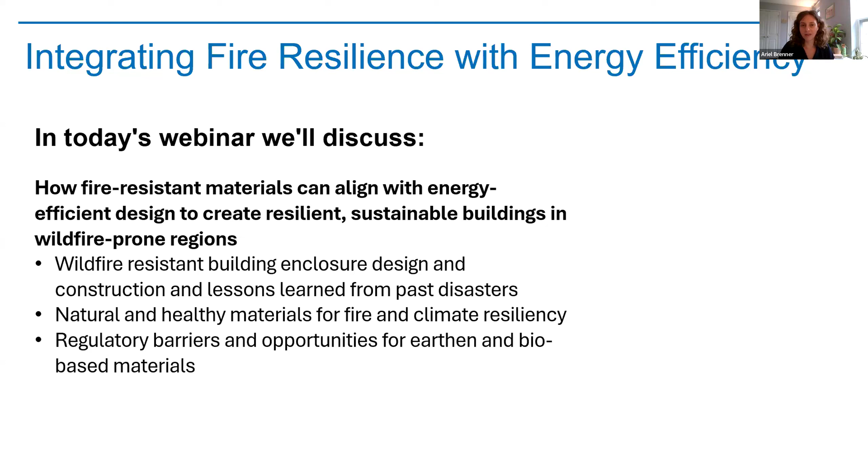So as I mentioned, we have a really fantastic lineup of presenters today. A quick introduction to them. Cameron Chorney is an associate and senior engineer with RDH Building Science, leading the development of RDH's Southern California practice. He's experienced in both new building projects as well as building enclosure assessments and renewals of existing buildings across the country. He specializes in high performance building design, including net zero construction, wildfire resistant enclosures, climate resilient enclosure design, and the development of policies and guidelines to advance building science.

Ali Keenan is an architect and designer who founded her own boutique practice, Ali Keenan Architecture. Her work responds to site and climate, celebrates the craft and honesty of materials, and has a sense of place and locality. She is a healthy material and sustainability advocate while actively researching alternative building methods and fire-resistant practices with the goal of making architecture more accessible and affordable for all.

And finally, Ben Loescher is the founding principal at Loescher Meacham Architects, where his work focuses on the reuse of existing buildings, high-performance workplace design for the film, television, and media industries, and innovation in earthen construction. In 2009, he created Adobe Is Not Software, the firm's advocacy arm that informs, enables, and advances adobe construction in California. Ben was the chair of the Earth Builders Guild, the U.S. trade association for earthen construction, from 2016 to 2023, and is a board member of Adobe in Action, a New Mexico-based nonprofit focused on assisting individuals in creating affordable earthen housing.

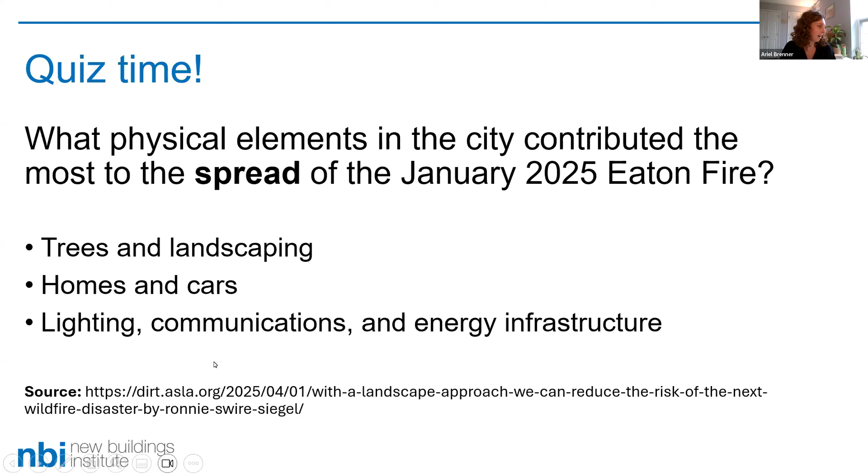Great, thanks, Ariel. And I assume everyone can see my screen there. Seeing some nods, great. Yeah, so like Ariel mentioned, Cameron Chorney with RDH Building Science. We're consulting engineers focused on building enclosures. And as you'll see today, it has a large contributing factor to wildfire performance of homes and other buildings. Quick disclaimer, trying to push out some information in industry and providing concepts here. So project by project definitely can change.

And what I'll talk about today is mostly what is wildfire resistant construction, why do we need it, get into some nitty-gritty assemblies and details that we can hopefully use on similar projects, and then look to the future and the current state of how do we minimize future events moving forward. So why wildfire resistant construction?

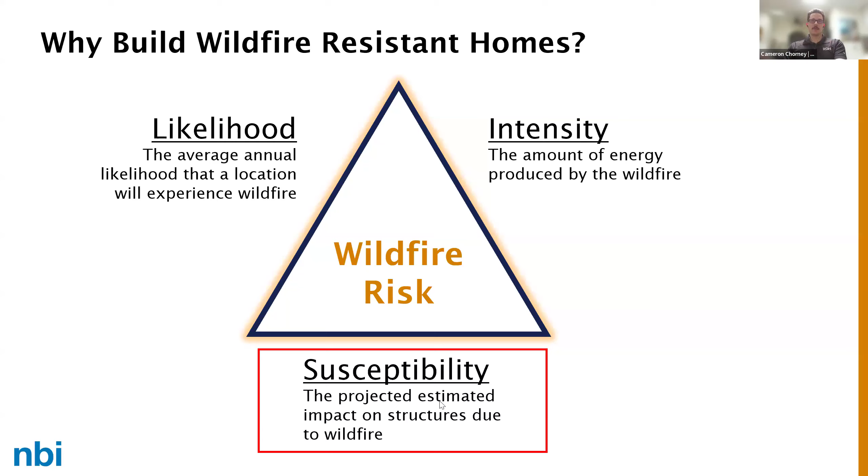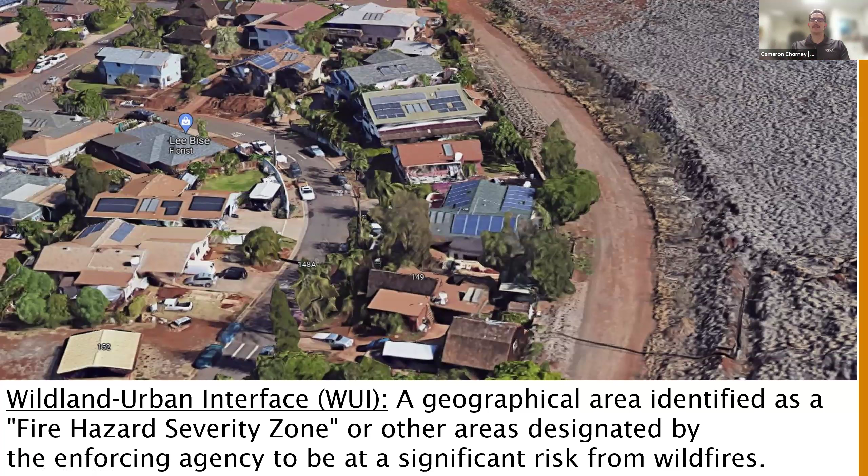And I'll mention WUI, or wildland urban interface, throughout this presentation. So just a quick definition for you. Geographical area identified as a fire hazard severity zone or other areas as designated by the enforcing agency to be at significant risk from wildfire. And this is a picture from Lahaina, which we know what happened there, unfortunately. And you can see the brushland on the right, and then right next to a community there. So that's the definition in picture format.

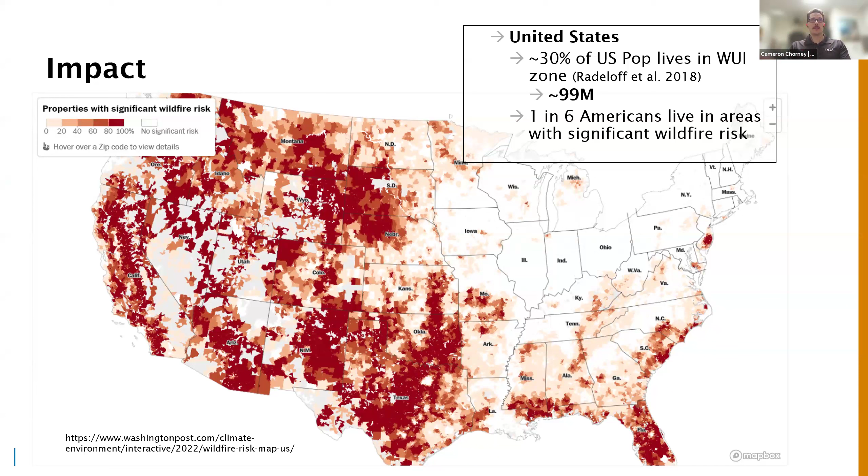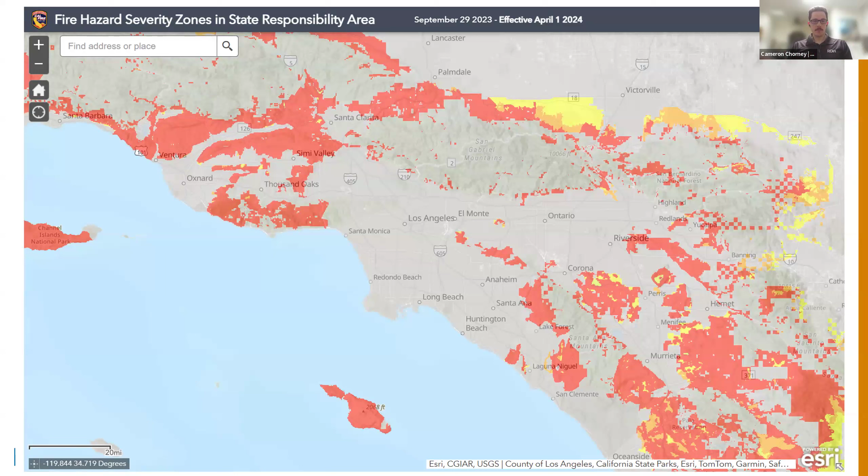And in terms of who is in that zone, the WUI zone, in reality, it's about 30% of the U.S. population, and so that's 1 in 6 Americans live in a significant wildfire risk beyond being in that. So it's closer than a lot of us think, unfortunately. And how might you know that you're in this WUI zone or wildfire risk? So a lot of it is defined in building codes, and from the building codes, they look to the local fire marshal. Here in California, the wildfire maps identify on a map where there are various levels of fire risk and severity, and that helps inform your decision making or need to be wildfire resistant.

So Ariel mentioned kind of trees versus cars versus homes at the start, and these WUI fires and disasters progress in various ways, but more often than not, it starts with a fire starting. Maybe it's a spark from an electrical wire, maybe it's some other ignition source, and with some high winds or dry conditions, that spreads in the wildland. And then when getting to the interface zone with houses, a lot of times it's ember transport that causes a lot of these homes to start igniting. And from there, we go from a wildfire, WUI zone fire to a structure or residential fire, which has a lot higher fuel density and load.

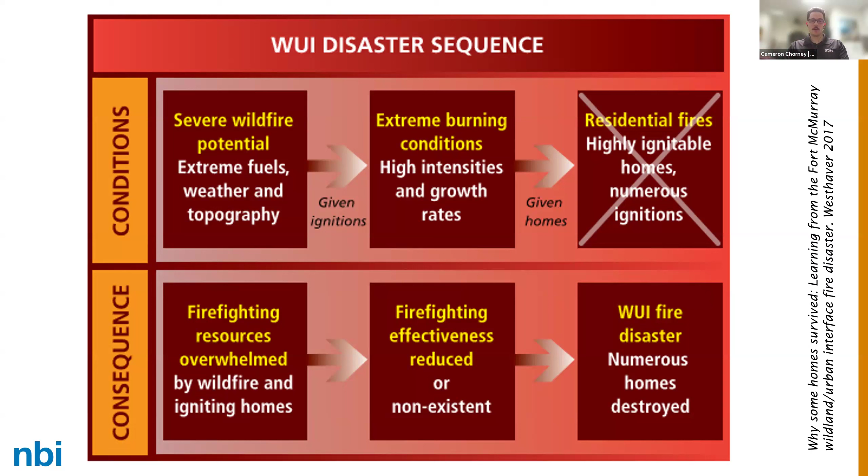And accordingly, you can see the consequence on the lower side. So a brush fire, a single brush fire, is pretty easy sometimes for firefighters to get to. But then we start progressing to more fires and then more structure fires. Firefighting resources can become overwhelmed pretty quick, and that's when it gets to a larger scale event like we saw, unfortunately.

So I mentioned how fires start. So Ariel mentioned the cars and homes versus trees and bushes. So the initial transport or start of a lot of the structure fires starts when the fire is away from homes, and it's actually the embers from various trees that are burning in high winds that get blown towards structures and get into ventilated soffits and to combustible materials in our structures that then catch on fire and then can progress to the structure fire type thing.

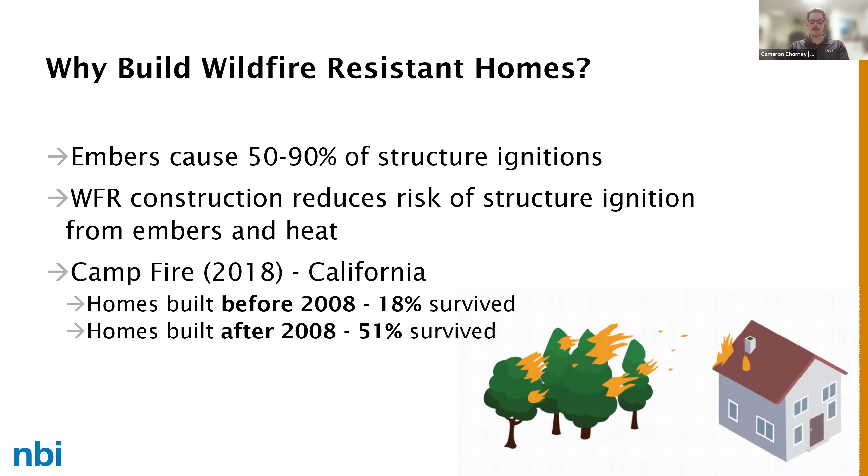A lesson learned from the Camp Fire in 2018. So we can see these numbers. Homes built before 2008, 18% survived, and homes built after 2008, maybe 51 or more percent survived. So what happened there here in California? That was when Chapter 7A in the California Building Code came into effect, implementing wildfire resistant construction. So proof in the numbers that it can work, and we do know how to help make it work. But still, even at code minimum, there is still some risk there, as we see with just 51% surviving.

So from there, how do we build those homes or those structures? Really, a wildfire resistant structure is intended to reduce structure ignition due to wildfire, and based on that, slow the spread throughout the community. So we'll talk a lot about the structure today, but as Ara mentioned, the big aspect is the landscaping and limiting the fuel in close proximity to your structure. So think the first 5 or 10 feet around your home with limited or no combustible material for those embers to catch on fire, and then more fuel load. And then outside of that, looking more to community level, limiting maybe the trees, or having certain wildfire resistant type trees and foliage to help limit that risk.

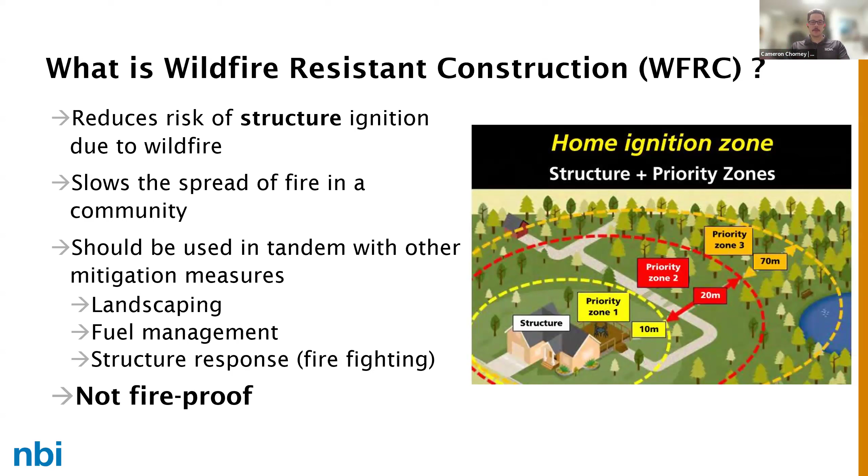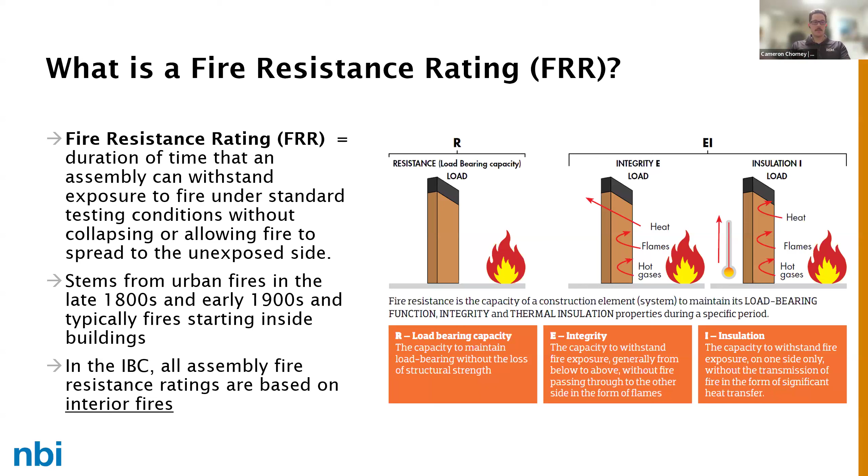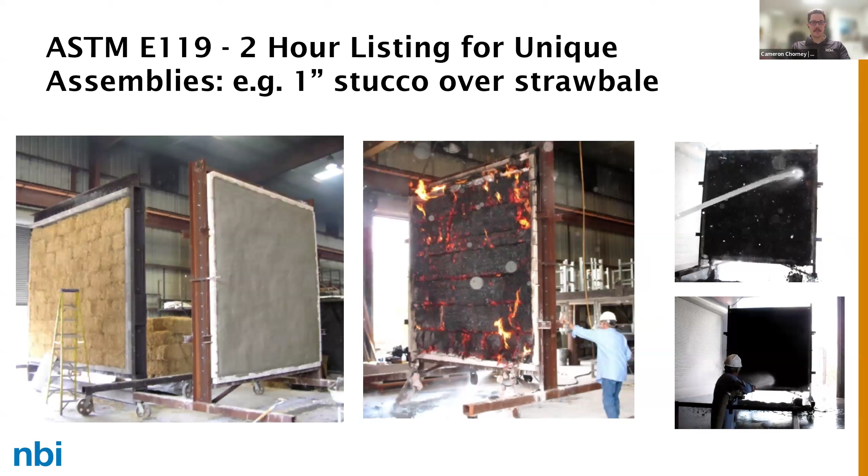And then finally, wildfire resistant construction is not fireproof per se, but it's meant to resist the loads that we're seeing with wildfire. And for maybe some architects in the room, you might hear fire resistance rating. A lot of the times we're thinking about interior and exterior when you might hear that in the code. So similar concept for exterior to interior with wildfire. So we'll say fire resistant rating quite a bit. And a nice example, a lot of different assemblies can be fire resistant. Even a straw bale with stucco assembly here, there's some testing to show that it is wildfire resistant.

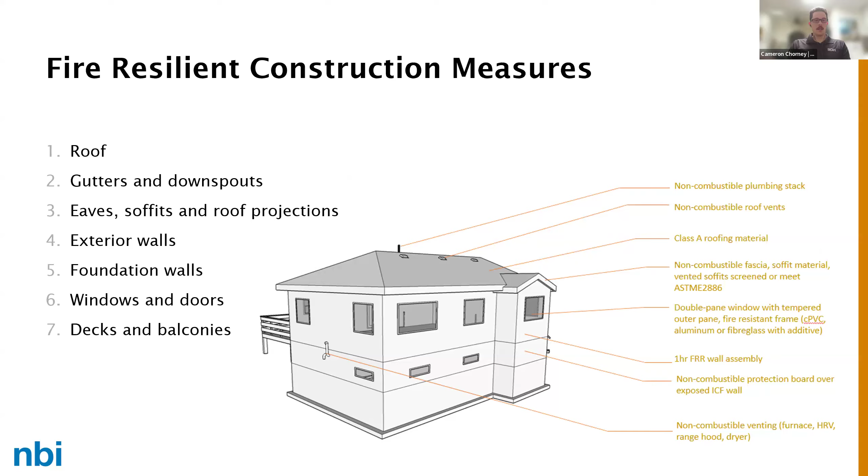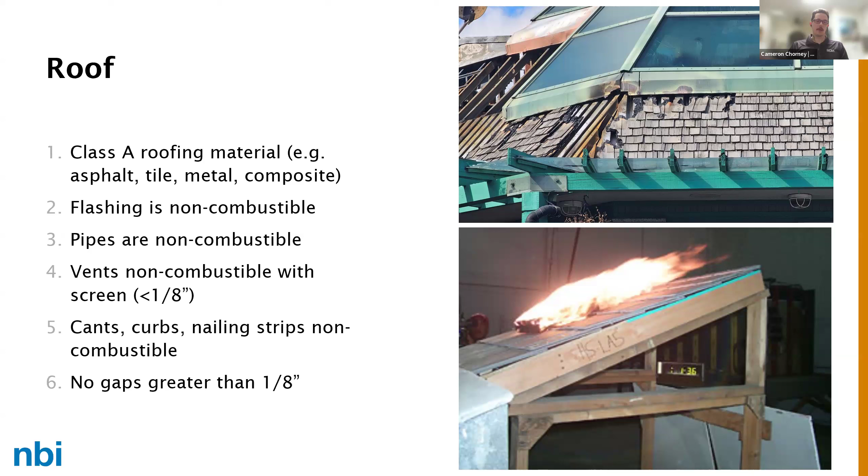And then looking at the various things that put together our structure that we need to think about. So you can see all the various aspects that we'll look at. So starting with the roof, we'll say non-combustible or fire resistant exterior surface a lot, and that's Class A roofing in this example. All flashing, pipes, vents. Like I mentioned, the embers are a big one with ventilated roof assemblies. So having vents that won't melt, so they're non-combustible, and that don't allow embers to go through them into that attic space, which has a lot of combustible materials up there, is super important. And then gutters, having a screen that stops debris from your trees from getting in there, more fuel essentially.

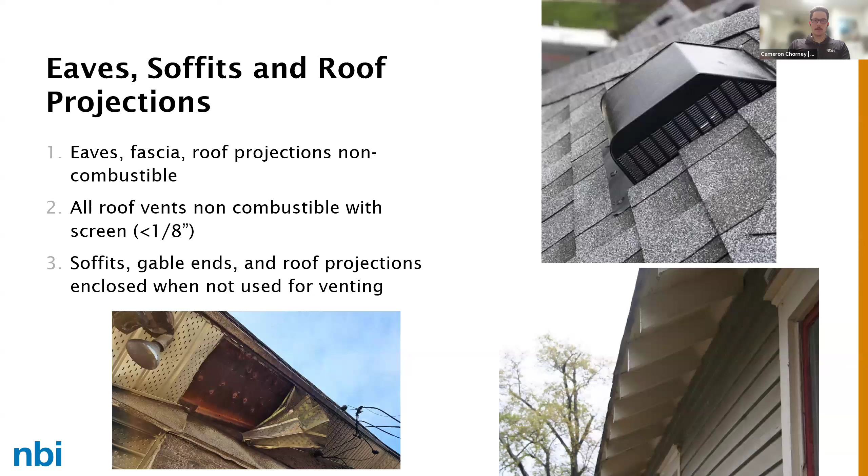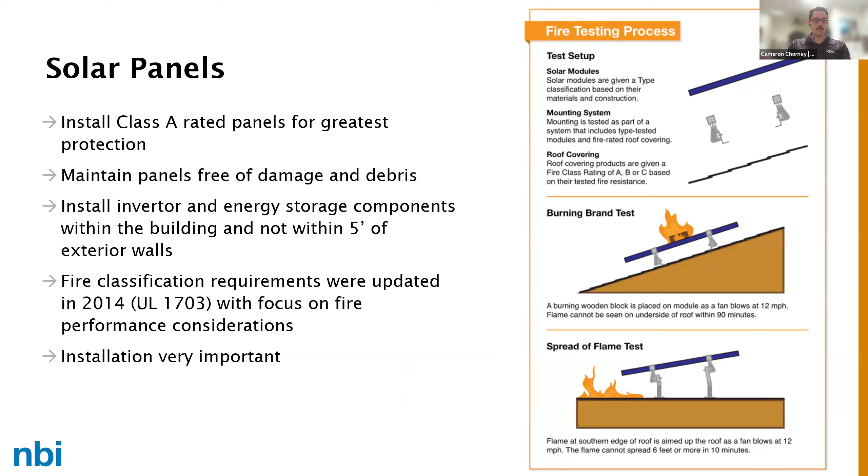Using soffits, so you can see bottom right with exposed wood, which is a high risk and very, very likely to catch on fire in a wildfire event. And then on the left, we saw some soffit venting, but they're not non-combustible. They fell out, and that can cause fire. So being non-combustible is important. And then looking at mitigation, solar panels are a big aspect of mitigation efforts in our building codes. They also have fire risk, so make sure they're Class A, similar to your roofs, and installation is important, and maintain those as well, make sure there's not much debris on them.

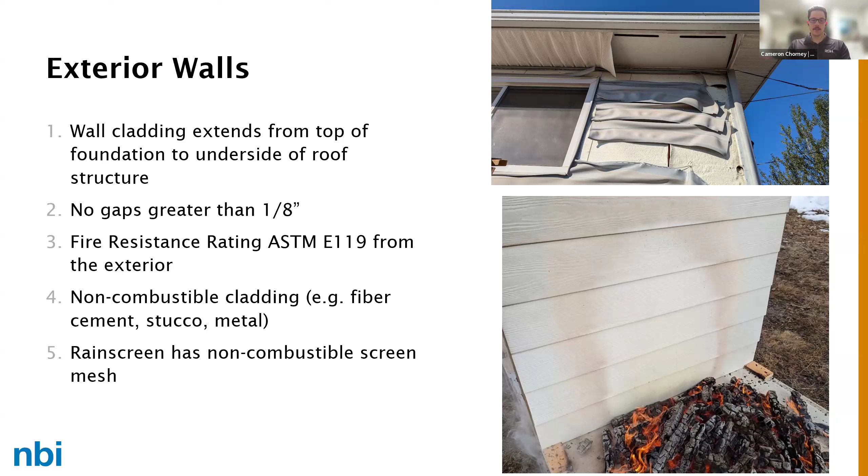Exterior walls, similar, fire resistant or non-combustible. Cladding is important. Think fiber cement, stucco, metal, not having any gaps, or we use rain screens a lot these days, not allowing embers to get up into that rain screen. So similar, using the mesh. And you can see some examples of vinyl in the top right, melting away, and fiber cement in our similar internal testing, that is pretty resistant. And then for some options to make those truly wildfire resistant wall assemblies, similar to other architectural assemblies, using gypsum is a good approach to prevent fire from getting to the structure, which is then the biggest loss event. And another one that ties in energy efficiency and high performance buildings, using exterior insulation that's non-combustible or fire resistant.

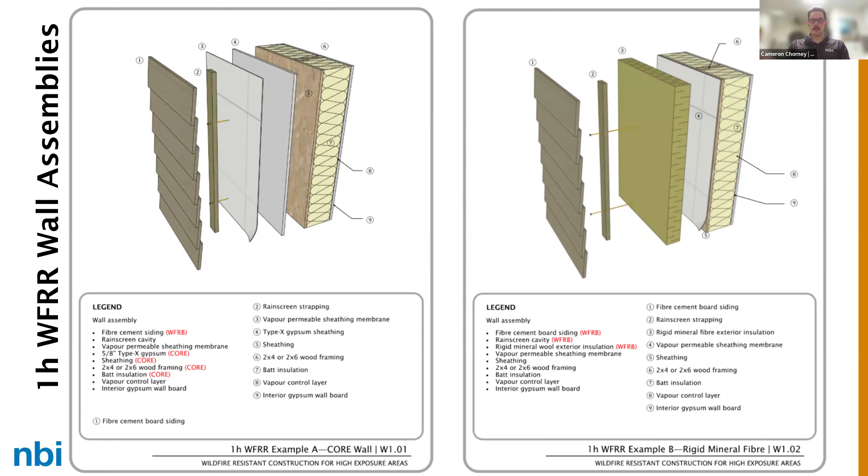And then windows, I didn't mention it yet, but they're also one of the biggest opportunities for fire to enter the structure and cause big damage. So how that happens with vinyl windows, which are on a lot of homes, the vinyl frame will actually melt, and the glass will just fall out of that window. Another is, you have a lot of heat, and glass can only withstand a certain amount of heat.

Annealed glass, float glass we call it. Tempered glass, which is more of a safety glass, is more heat resistant. And one way we can do that is with double pane, with a single pane of tempered glass. And through some testing, the location of that pane is important, usually on the exterior side.

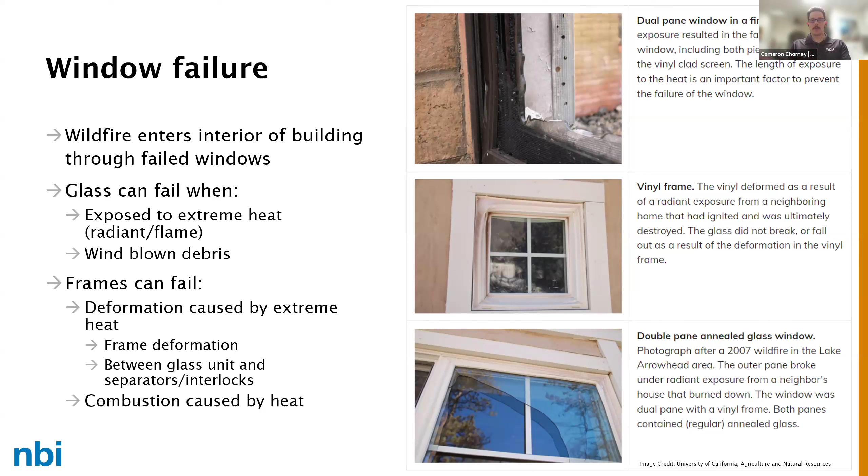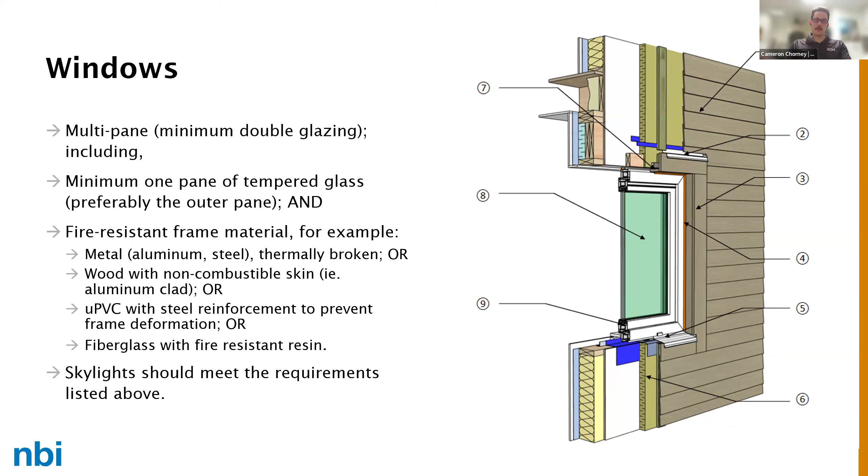So windows, using a fire resistant frame material, think aluminum, steel, some other ones. And then if you are using vinyl, which is allowed by the code currently, allowing reinforcement or designing those windows so that the glass doesn't actually fall out. And similar idea for skylights.

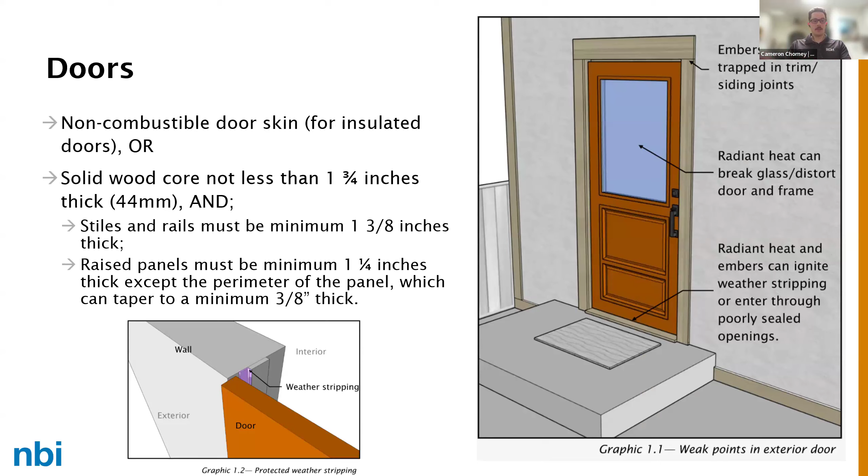Looking at doors, so similar non-combustible doors, and then looking at the details around those doors, not allowing embers to get in. So using weather stripping and other non-combustible stiles and trims and flashings. And then looking beyond assemblies to the actual details. So great, we have all these nice fire resistant assemblies, but it's always the details in between them that can be challenging and vulnerable.

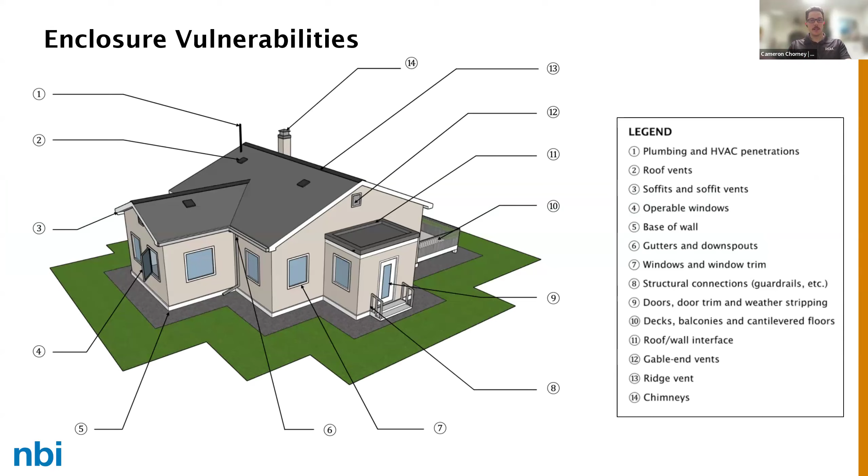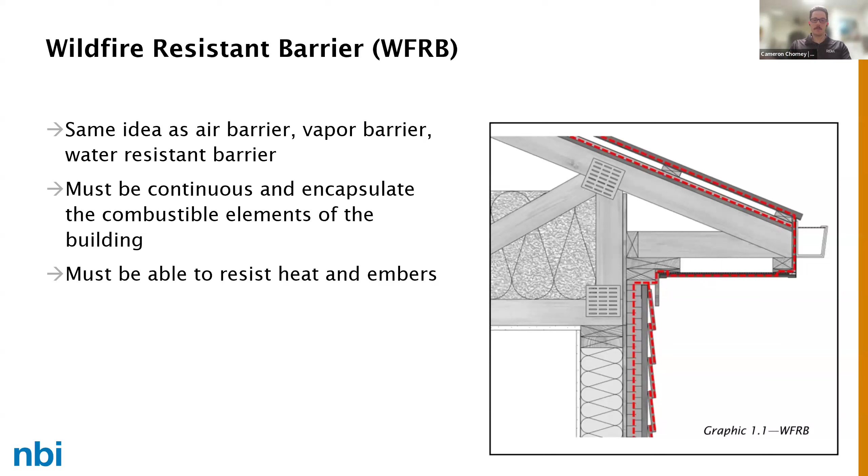So starting with wildfires and assemblies, and then looking at all those little interfaces. As a building enclosure consultant, we always look at the control layers, thinking of an air barrier or a water resistive barrier, trying to be a consistent line, continuous around your building. So we really look at the next control layer as being a wildfire resistive barrier. Can you draw a line without picking the pen up off the paper around your building and all your details through the wildfire resistant construction or barrier? And what is that assembly, what is that material, and how are all those things coming together? It's super important to reducing the vulnerability.

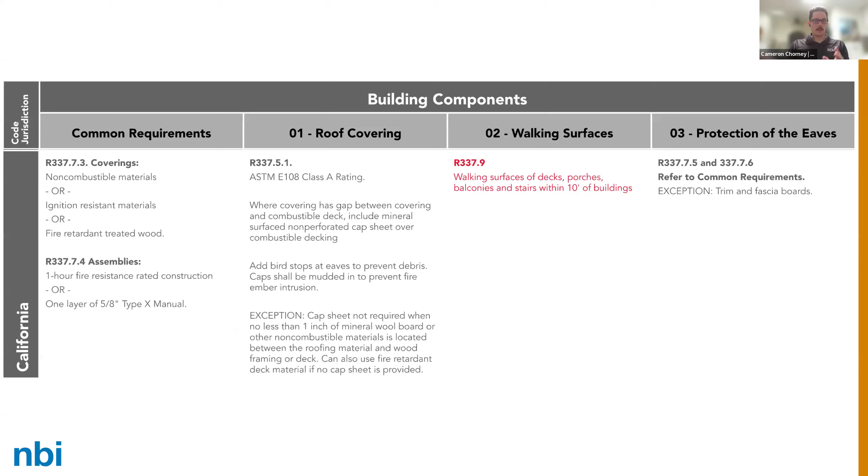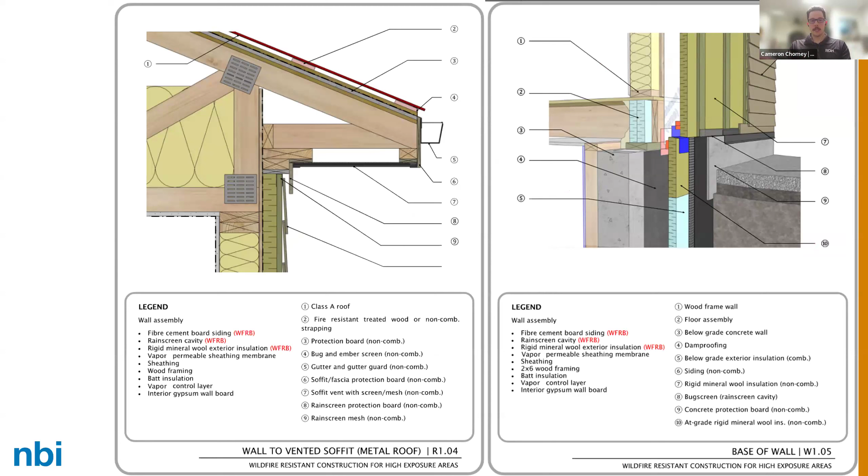And then to bring this together, some details. So we worked on a guide with Rockwool, and we've done some other internal guides to help pass this information along. These are all the assemblies based on different codes: walls, foundations, gutters. You can see here glazing. It's really wrapping up all these lessons learned into guidance to help push the industry forward. And then we have some details in there that point out specific materials to not only provide wildfire resistance but energy efficiency and good building enclosure practices. Similar for windows.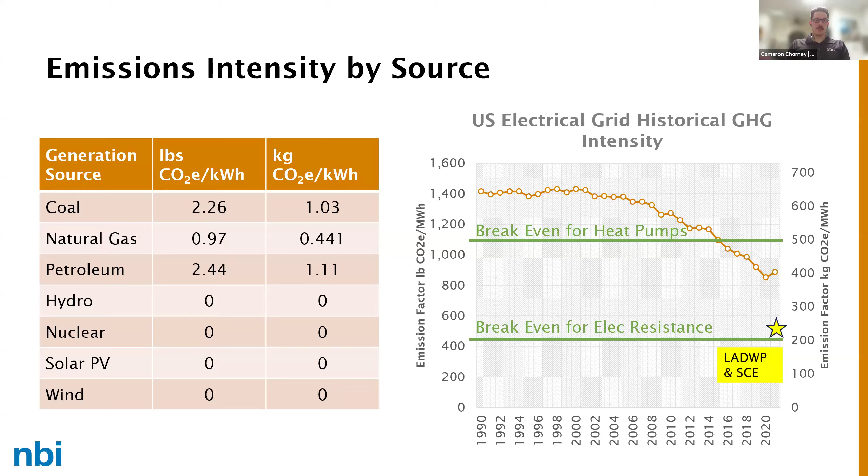You can see just locally here where I'm at in Los Angeles, LADWP and Southern California Edison have switched from natural gas and coal to more electric and renewable energies. So you can see the grid greenhouse gas emissions are much lower than the rest of the US. And that provides an opportunity, as you build a home, if your grid is very green, to use less combustibles by switching to electric appliances or heating and cooling systems, or even vehicles. There are huge opportunities to reduce greenhouse gas emissions and hopefully slow climate change by using electric as opposed to gas.

So this is an example from a hospital we worked on. Reducing energy use as much as we can with high performance enclosures, but then fuel switching. You can see on the right, from that baseline with code minimum and combustible natural gas for fuel, switching to high performance and electrification reduces up to 80% of operational greenhouse gas emissions, which is massive over the long term.

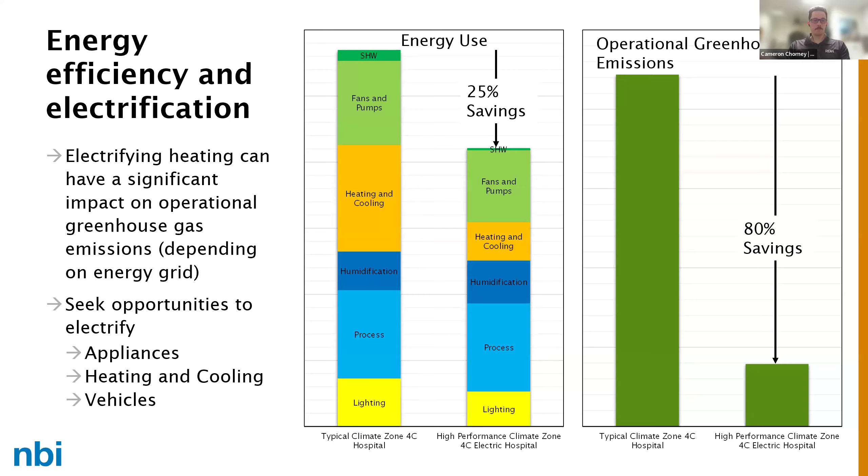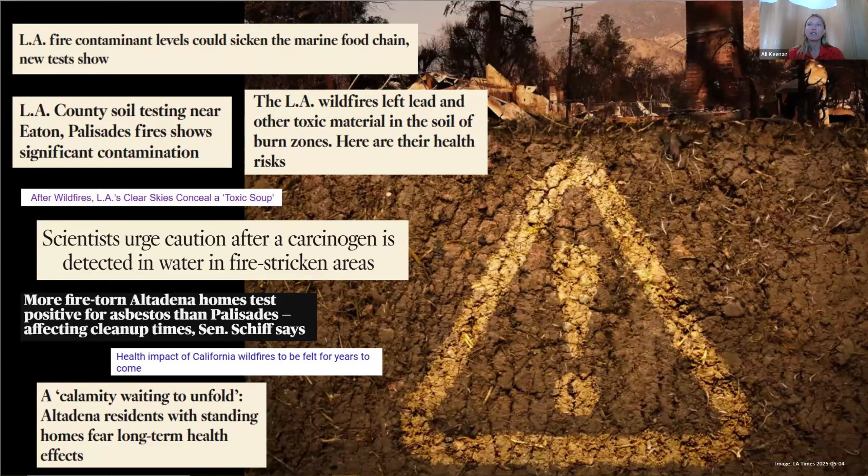As an aftermath of the January 2025 Los Angeles fires, we've seen dangerous air quality, benzene contaminating the water supply, lead and arsenic in the soil, heavy metals in the ocean. 5 months later, and we're still finding new levels of pollutants. These chemicals put us at risk of cancer, hormone disruption, nervous system disorders, reproductive challenges, infertility issues, and other life-threatening diseases. There are also many unknown lasting consequences and questions. Will kids ever be able to safely play in their own backyards again? These toxic chemicals are coming from our buildings.

When I look at this photo, I see the emotional trauma of loss, but I also see the amount of waste. Buildings and the materials that make them deserve a longer life expectancy. The construction industry is one of the most significant contributors to climate change. It's the world's largest consumer of resources and raw materials. It's also responsible for 30 to 40% of global CO2 emissions.

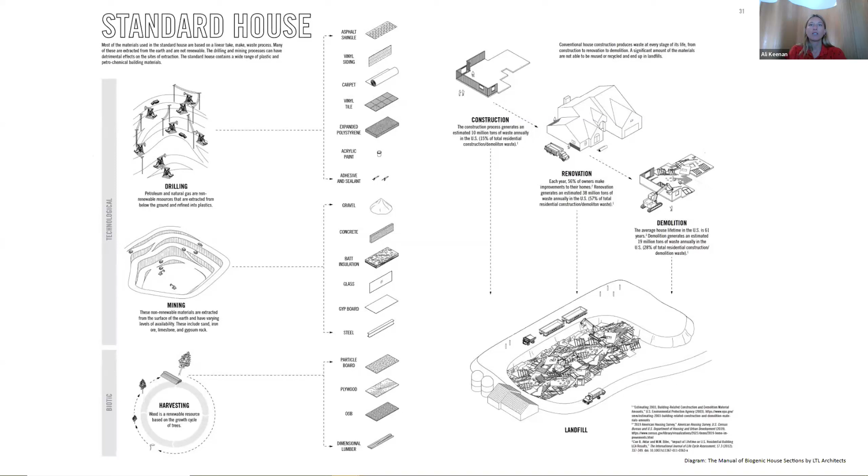As this diagram illustrates, most of the materials used in a standard house are based on a linear take, make, waste process. We mine, we drill, we harvest, over and over and over again. Only a small portion of materials are from renewable resources. Then we use tens of thousands of tons of hazardous chemicals to turn these resources into building products each year. Chemicals that are linked to negative impacts on human health, a decline in biodiversity, an increase in greenhouse gases, and many other environmental disasters. An alarming amount of these materials then end up in landfills each year, not able to be reused or recycled.

To me, when we talk about fire resiliency, we can't leave climate resiliency out of the conversation. Climate change is happening, and there's no stopping or solving the crisis at this point. We do have the tools to minimize the damage, mitigate the effects, and stop it from getting worse. But it will take collective action and an industry shift. We also have a nationwide health crisis. Whether people know it or not, they are getting sick from their buildings.

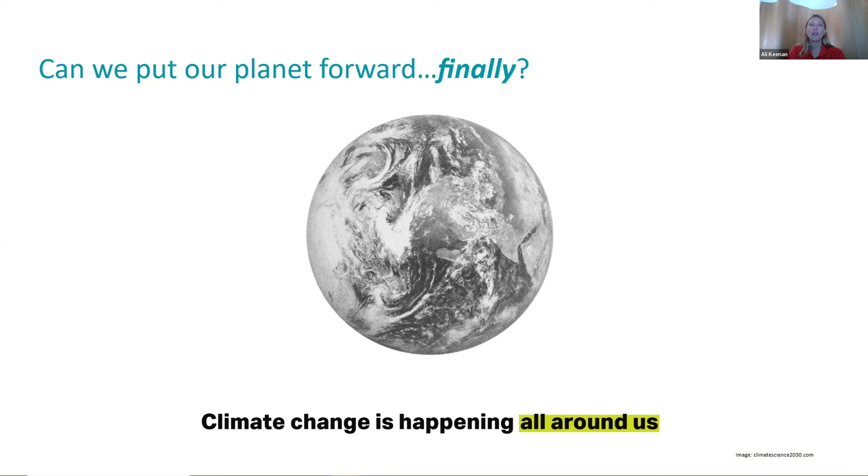That being said, fire resilience requires a holistic approach. There isn't one solution to make a building fire resilient, nor will anything ever be 100% fireproof. How can we make less of an impact to our communities, to our planet, to our health? How can we reduce the amount of environmental pollutants, plastics, foams, forever chemicals? How can we lessen the impact to our planet's resources, raw materials, and labor force? We need to steer the rebuilding conversation this way, to more sustainable, more natural, and healthier building techniques and materials. This typology is truly high-performance design.

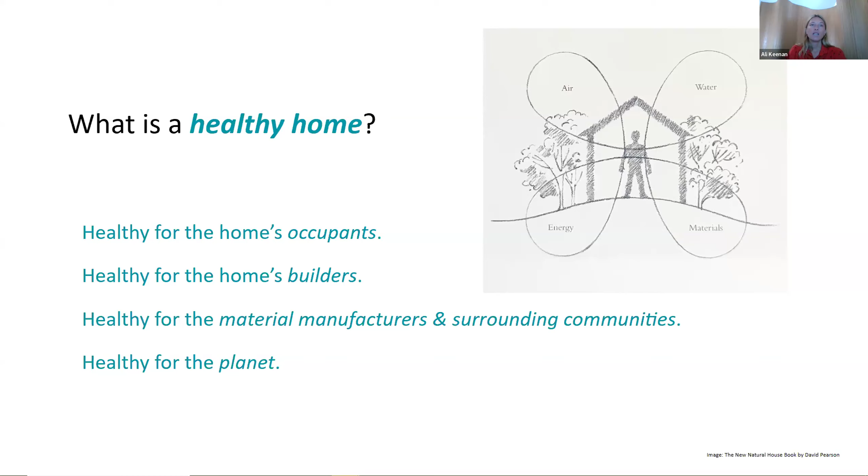What is a healthy home? Healthy for the home's occupants, healthy for the home's builders, healthy for the material manufacturers and surrounding communities, healthy for the planet. At this point in time, this concept still takes an immense amount of convincing to both homeowners and contractors. I hope to give you some tools to evaluate your decisions as design and building professionals. Once we get more momentum, we can build more purchasing power to help stabilize the pricing and supply chain of these products and to grow the knowledge base for labor and installation. We, as building and design professionals, have a lot of power.

Americans spend approximately 90% of their time indoors. The air inside our homes is 2 to 5 times more polluted than the air outside. Chemicals and materials are not static. Volatilization, leaching, oxidation, and degradation are some of the processes that release substances from materials into the surrounding environment. On a typical day, you are then exposed to these chemicals through inhalation, ingestion, and dermal absorption. Now fire is thrown into the mix, creating toxic ash, dust, and new chemical byproducts called dioxins that contaminate surfaces, air, water, and soil.

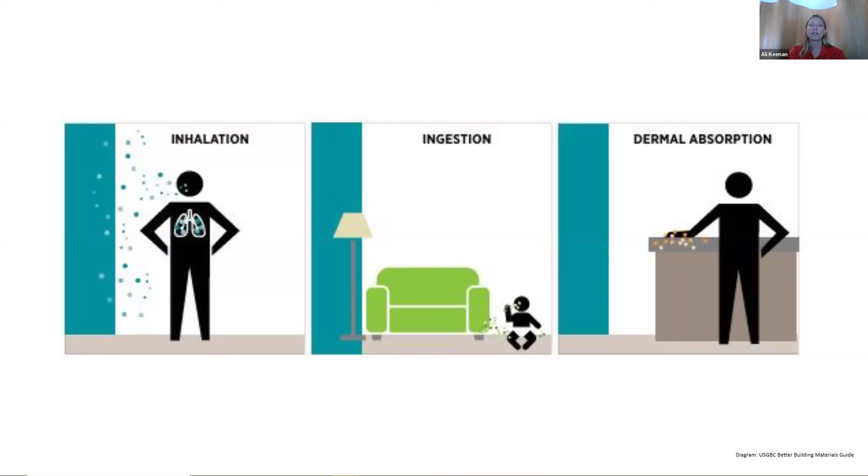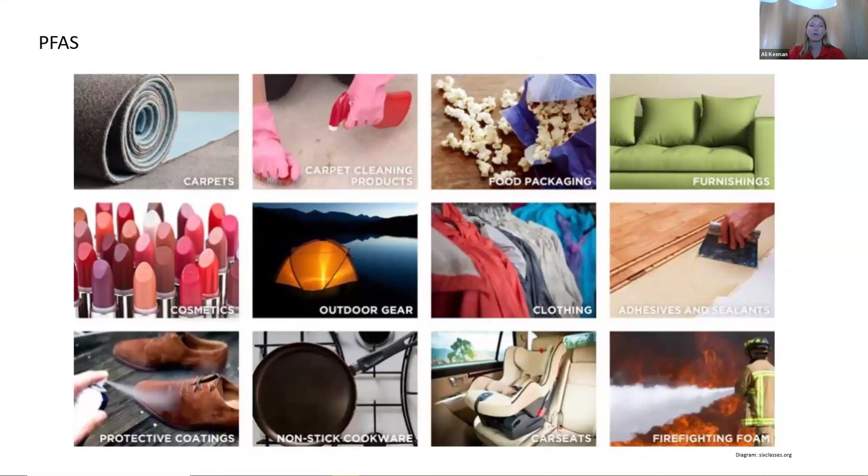The use of flame retardants in furniture, mattresses, children's products, electronics, and building materials provides limited fire safety benefit. Research shows that they often delay ignition only a few seconds and can make a fire more toxic. Even flame retardants developed as eco-friendly alternatives could be more harmful than expected.

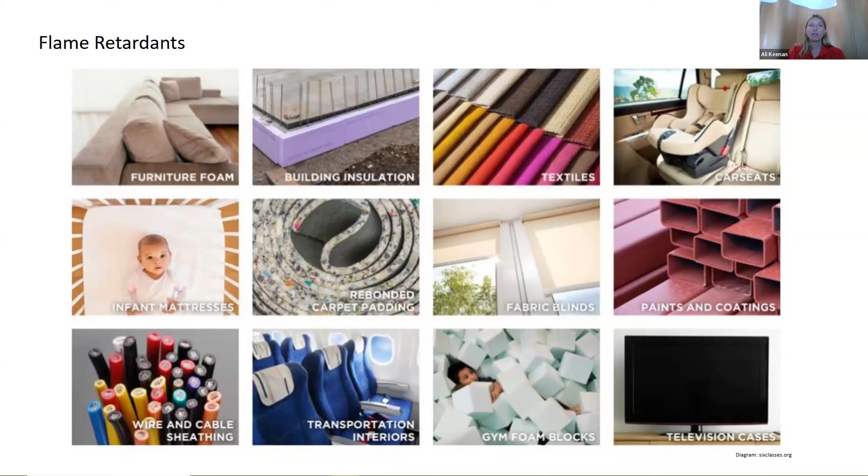There's a common pattern in industrial chemistry to replace banned chemicals with similar yet not well understood compounds. Often the substitute compound turns out to be equally problematic. Smoke detectors and sprinkler systems are more effective to prevent a house fire with an interior ignition source. Sheep's wool is a natural alternative to chemical flame retardants found in upholstery and mattresses. There are bio-based materials that are inherently fire resistant for exterior rated assemblies and building insulation.

In the haste of rebuilding, I've heard a lot of people throwing around foam panels, concrete bunkers, Trex siding as a solution to fire resistance. Fire resiliency doesn't need to be concrete or foam or plastic. We can turn to plant-based and earth-based low-carbon materials. We can incorporate these into fire-resilient assemblies.

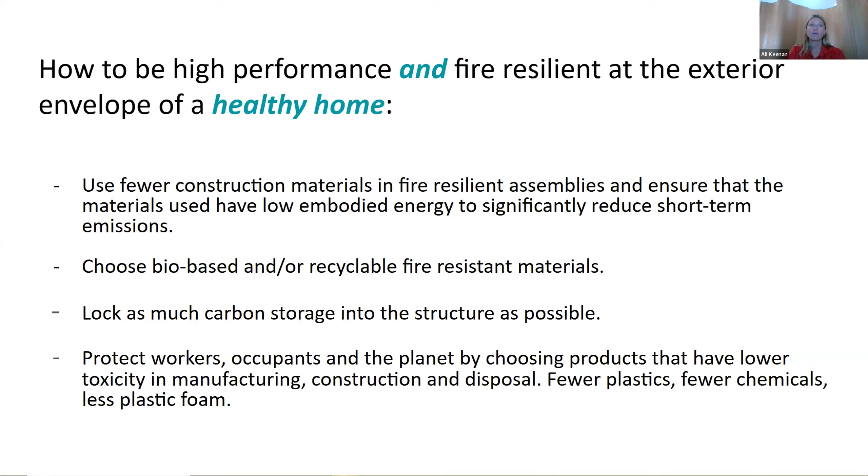Earthen building is the world's oldest high-performance and sustainable construction technology. Materials that originate from ecological sources combined with current technology can produce durable, high-performing, and regenerative building products. Many earthen and bio-based building techniques are inherently fire-resistant. They have low embodied energy, small carbon footprints. They naturally sequester and store carbon from the atmosphere. They can replace plastics and other fossil fuel-based products. Ideally, they biodegrade at the end of their useful life and benefit the ecosystems.

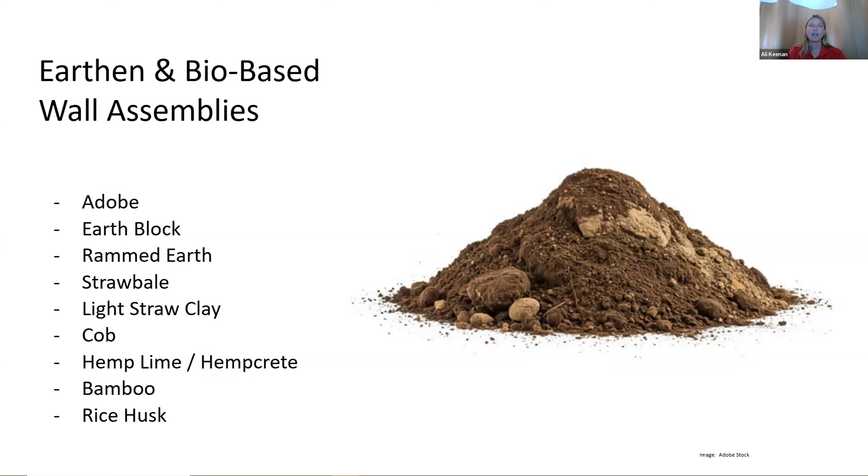Earthen and bio-based materials lead to an entirely new wall assembly, which includes the elimination of several material layers found in a typical wall section. Looking at hemp lime specifically, you can see in the right-hand column that there are only three materials needed for the wall. Because of its inherent qualities, it acts as paint, drywall, insulation, vapor barrier, and metal lath. Compare that to a traditional wood clapboard assembly that uses double the materials. This simplification reduces the complexity of a wall, reduces cost, and significantly reduces the amount of embodied carbon.

Hemp lime is naturally flame retardant, which eliminates the need for added flame retardant chemicals. The material's vapor permeability and humidity regulation can drastically reduce mold and bacteria growth, eliminating the need for added antimicrobials. It's also naturally resistant to pests, eliminating the need for pesticides. Hemp and lime products are naturally biodegradable and can be fully recycled to support a zero-waste economy.

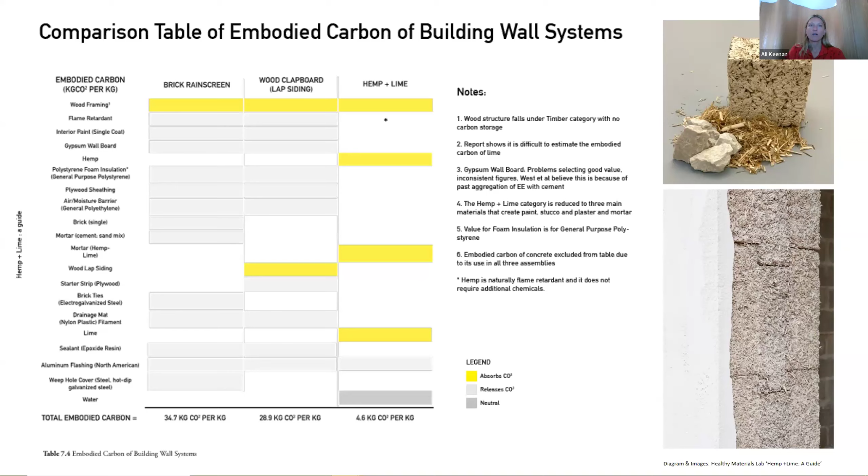Let's take a look at a more conventional construction assembly. When considering high-performance design and fire-resilient design, even separately, unvented roof assemblies are the answer. Continuous thermal bridge-free insulation is the best insulation. It provides predictability and protection. It pushes the condensation plane to the exterior of the roof, mitigating moisture and mold issues. It eliminates eave and roof vents, which are common entry points for embers during fires. Continuous insulation also acts as a fire-resistant layer of the assembly.

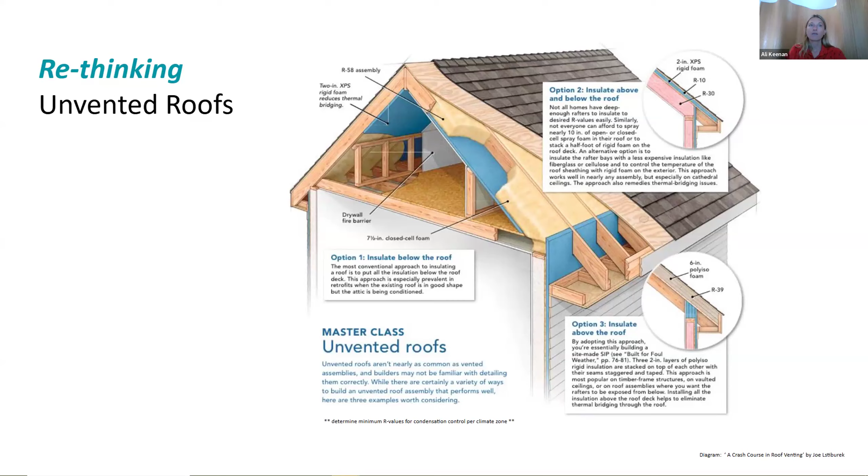When evaluating these conventional assemblies, the website Informed is my first stop. For each building component, it lists the different material choices and rates them based on health impact. Here you can see that rigid foam boards and spray foam are all in the red. Looking to the green zone, we find alternative insulation boards that work with this assembly: expanded cork, wood fiber, and mineral stone wool.

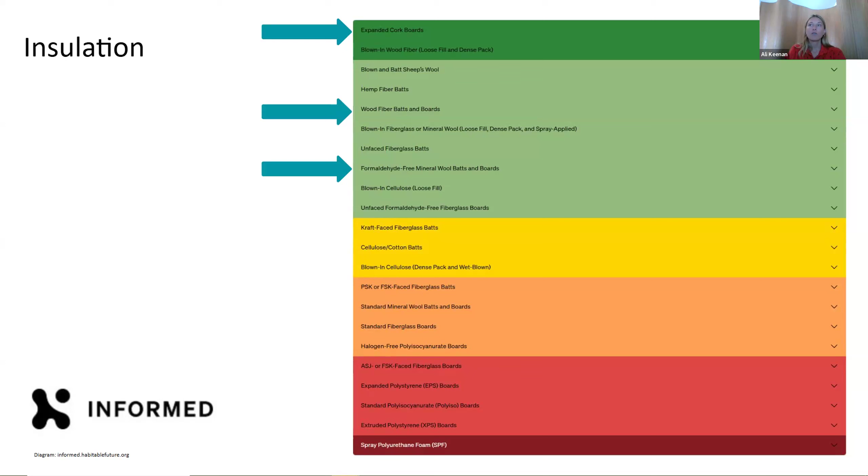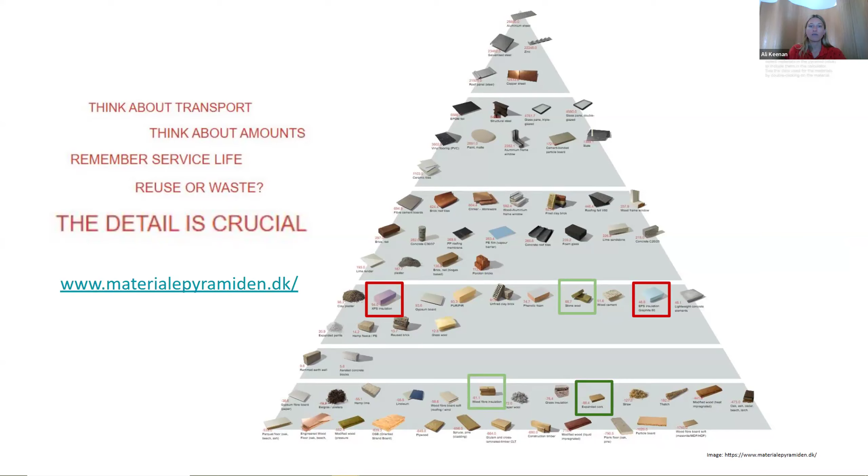Using these tools, we found 3 healthy home alternatives for an unvented roof assembly. Cork and wood fiber are renewable resources with negative carbon emissions, no environmental pollution or damage to health. Both have Class B fire resistance. They're workable without skin itch or irritation. At the end of their life, they're recyclable. Cork is even biodegradable. Nearly perfect on paper, historically they have been harder to source within the US market and have a higher upfront price.

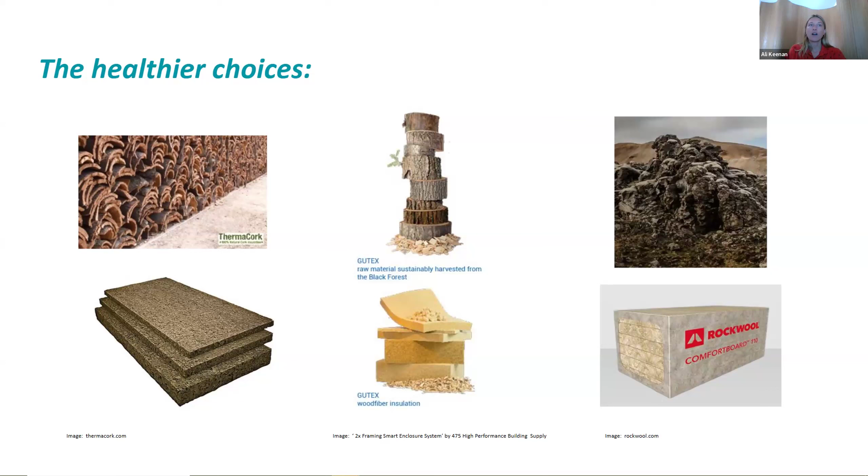Let's change that. Stone wool is a little less perfect, but it is a more readily available and cost-effective option that still aligns with a healthy home. Companies like 475 High Performance Building Supply, Small Planet Supply, and Rockwool are great resources with open source assembly details using these alternative materials.

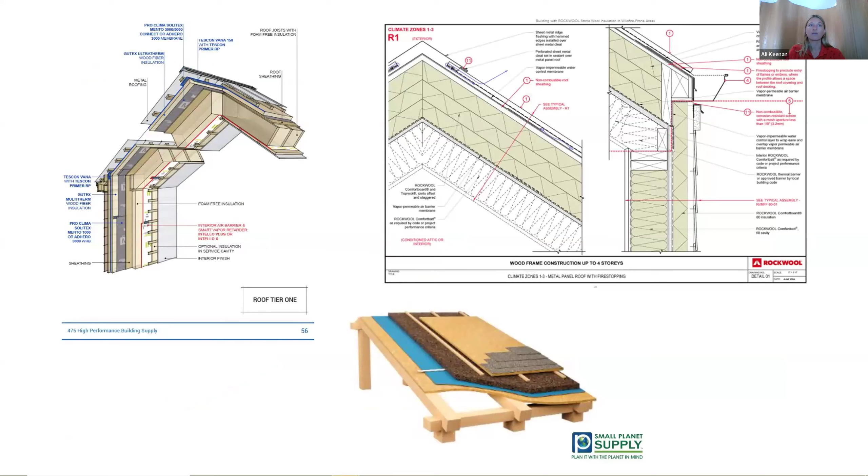Another great resource that I can't fail to mention is the Healthy Materials Lab from Parsons School of Design. They offer an extensive materials database geared towards healthy materials, as well as material teaching guides and coursework. This is where I got my start as an advocate.

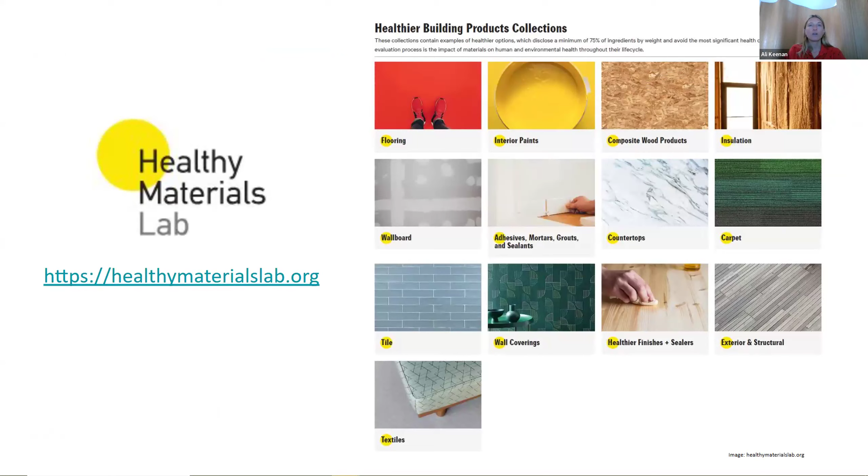All it takes is some conscious decision-making, and we can move away from high-carbon, toxic materials sitting in a landfill polluting for their entire life cycle to negative carbon materials that are chemical-free and compostable. We can't deplete the planet of her resources and then expect that she will be kind in return. We can't use toxic materials and expect not to get cancer. We can't build the exact same way as before and expect to have better environmental quality during and after a fire event. Let's meet this challenge with optimism because we actually do have actionable tools to help mitigate this crisis.

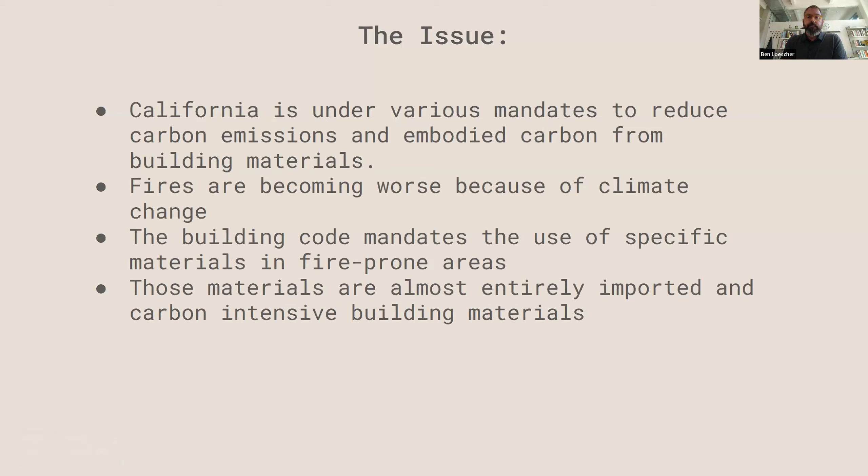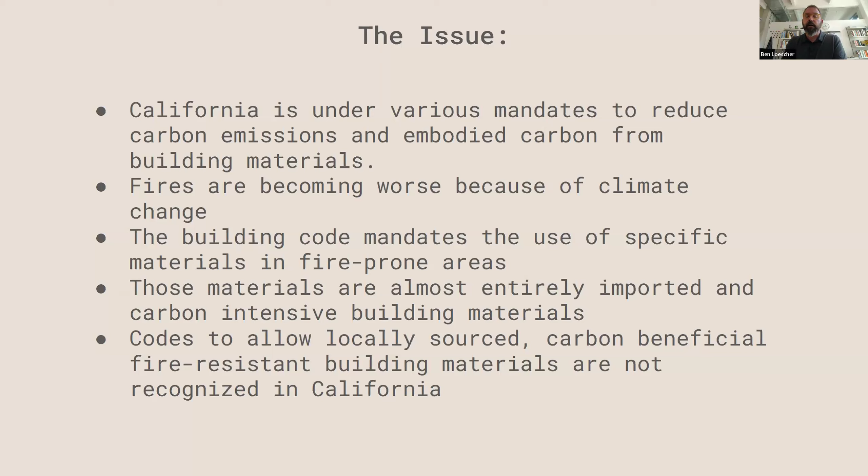First, California is under various mandates to reduce carbon emissions and embodied carbon from building materials. And I'll talk a lot about California because I think we are the canary in the coal mine in this case. And what's going on here, I think, is representative of what's going on in a lot of other Western states. We know that fires are increasing both in frequency and intensity due to human-caused climate change. The building code in many jurisdictions mandates the use of specific materials in fire-prone areas. Those materials are almost entirely non-regional and carbon intensive. And codes to allow locally sourced carbon beneficial fire resistant building materials are not recognized in California as well as many other states.

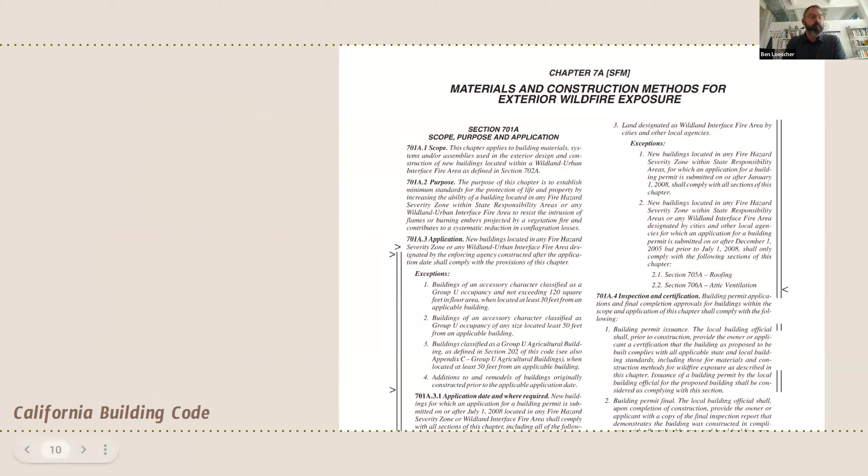And while we're all having a lot of discussions about home hardening to increase the resistance that wood frame construction has to external fire sources, these code provisions have been part of the California Code here since 2008. And while well-meaning, the solution is also part of the problem as it's currently presented.

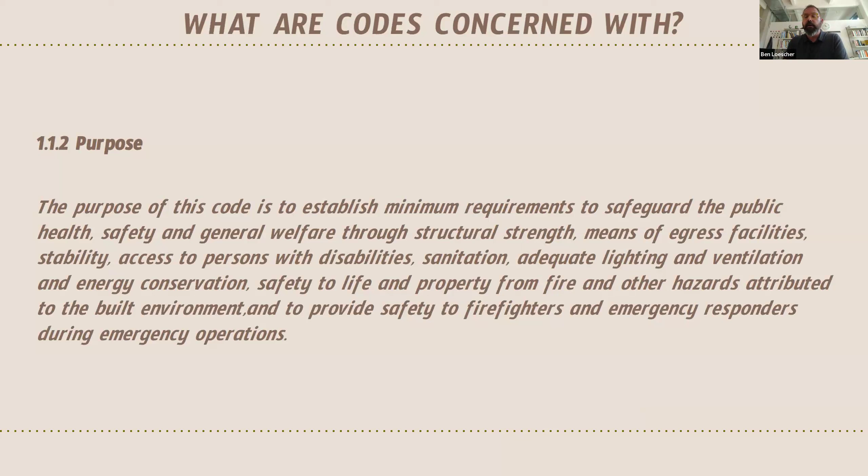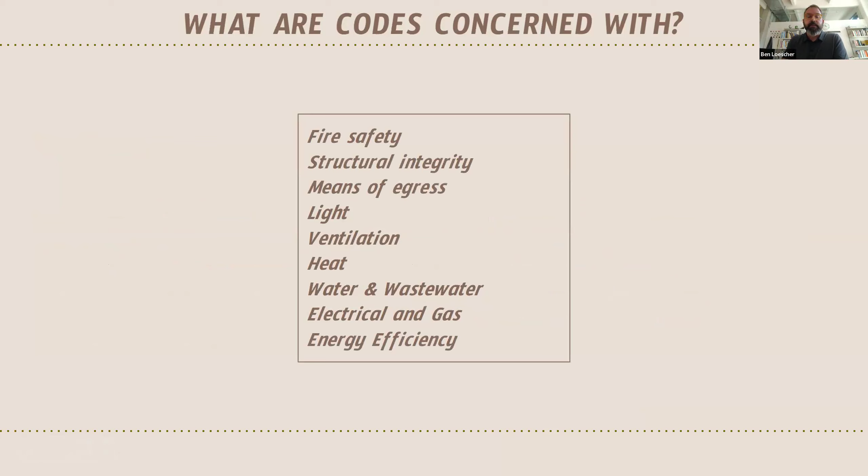The issue is really that the building code is scoped in a very particular way around particular concerns. And here I'm showing you an excerpt of section 1.1.2 of the California Building Code, very similar to what's in the International Building Code. And what it cares about are a handful of specific issues that are pretty well known to us: fire life safety, egress, durability, light, space conditioning, to some extent, water use, energy efficiency.

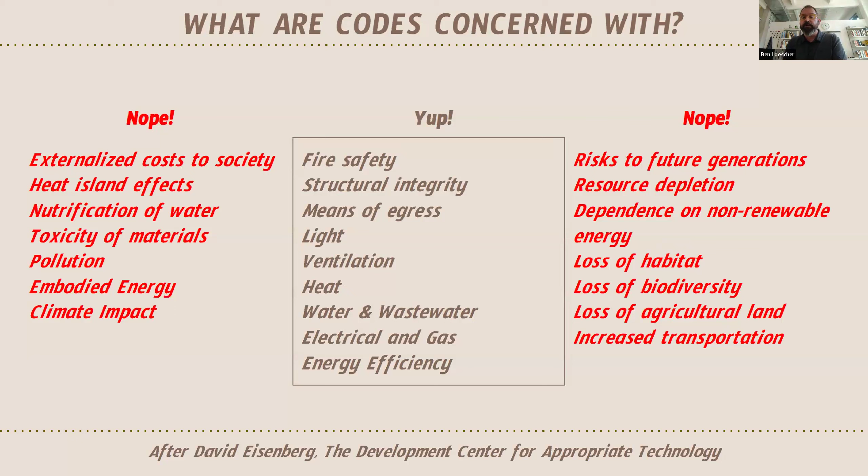But they're not at all concerned about other things that we're finding of urgent concern in the wake of these fires. I'll highlight just a few of them, but it's a big list. Toxicity, embodied carbon, climate impact, end-of-life consequences for materials when the buildings are no longer used. These are not considered as important by the building code. And so we know that's not sufficient, but we have to rebuild with the codes that we have. So what's currently possible?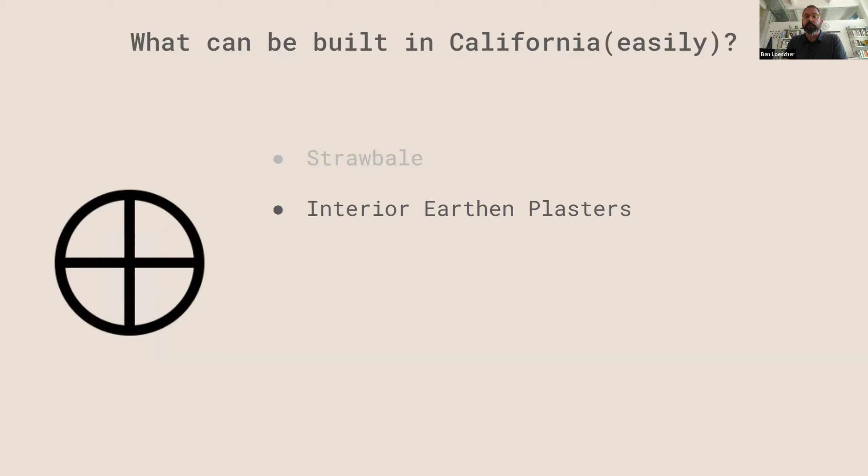Here in California, straw bale is the easiest. We have this California Residential Code Appendix BJ, which was adopted throughout the state as a result of an assembly bill due to the work of a bunch of rice farmers, interestingly enough. Interior earthen plasters. Interior finishes are relatively lightly regulated and easy to use. Exterior lime plasters are allowed by the California Residential Code and IRC R703. That list of code endorsed materials is a pretty short one. This is like where we're getting to the edges of what can be done easily.

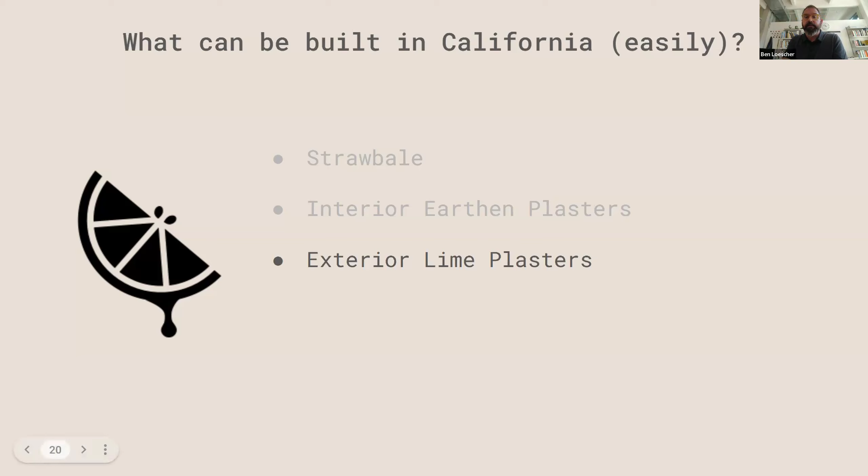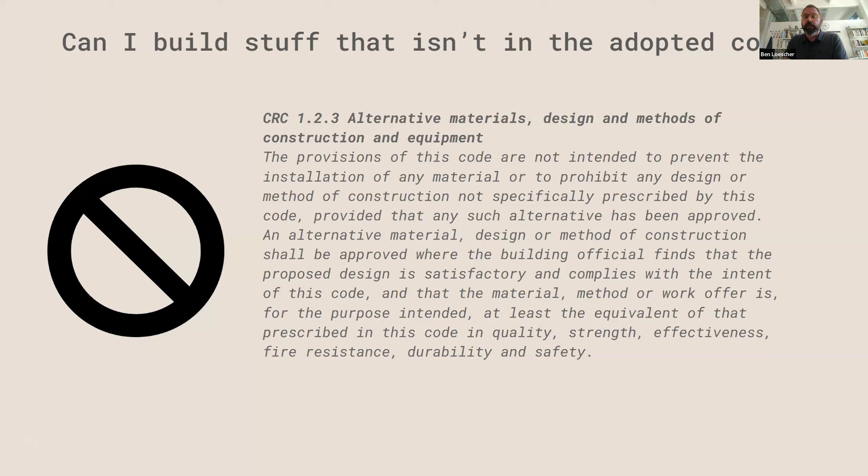And the question is really, are we stuck with only those things that are explicitly permitted by the building code? No. Any code that is based on the IBC or IRC, California included, has this provision, 1.2.3 in California, for alternative materials. And what this says is that you can use any material or assembly that you can show as equivalent to other materials in the code. That's for flammability, durability, structural performance, all that kind of stuff.

The good news: in many jurisdictions, that's enough. LA County and the City of Los Angeles are unique, I would say, maybe not perfectly unique among California jurisdictions, in that they require third-party evaluations intended for manufacturers of what are mostly mass-produced products in order to demonstrate compliance. So for earthen and bio-based materials that are locally sourced, more variable in their properties, these testing requirements can be effectively impassable hurdles.

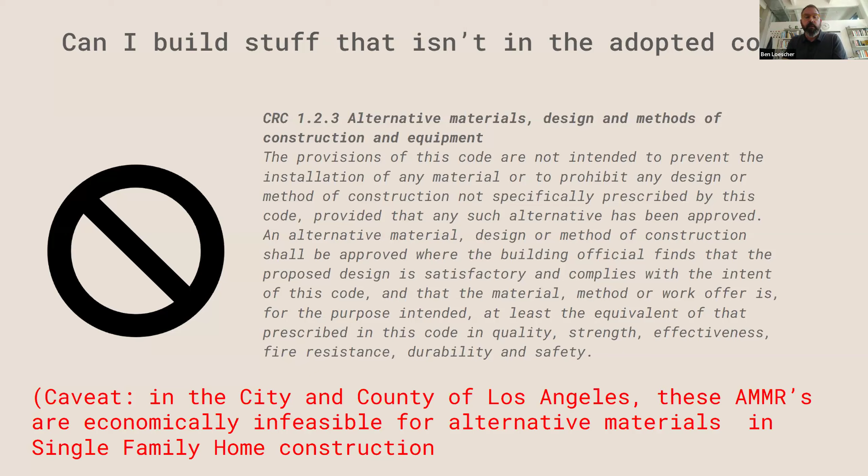So that said, what isn't specifically in adopted codes, but still possible with some grit? Light straw clay in a lot of jurisdictions. This one is relatively easy to use. There's an appendix BI in the International Residential Code that guides its appropriate use. Good luck, City of Los Angeles or County of Los Angeles. I think they appear not favorable towards the use of these materials. Hemp lime, hempcrete, same thing. There's an appendix in the IRC that makes it available. Good option in other jurisdictions, not so much City or County of Los Angeles.

Cob, monolithic adobe. This is a great one in non-seismic areas. It can be used with restrictions in higher seismic risk areas. Not currently a viable option in the City or County of Los Angeles unless things change. And then, what's in the code but hard to use? This is sort of a different category.

Adobe brick is in these. It's in the International Building Code. It's in the California Building Code. The provisions around it are challenging because building codes are mostly authored by trade associations and funded lobbyists. That hasn't been available for a lot of earthen and bio-based materials that don't have huge profit incentives to impel lobbying by manufacturers. Tough one to do in City and County of Los Angeles. We have been successful in San Bernardino County.